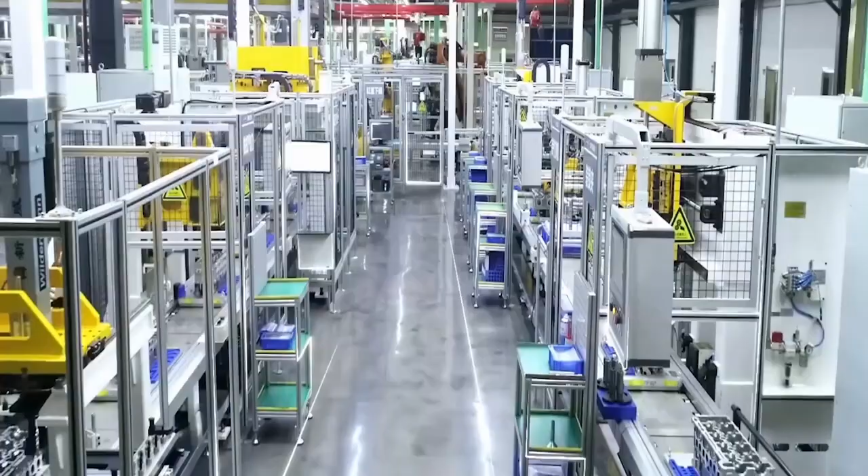Brief introduction of YC6L series engine. Designed jointly by Yuchai and Germany FEV Engine Technology Company Limited, a world-renowned research and development company for internal combustion engine. The YC6L series engine is a high-power commercial engine created by dozens of top experts, incorporating current international advanced design concepts and developed design methods.

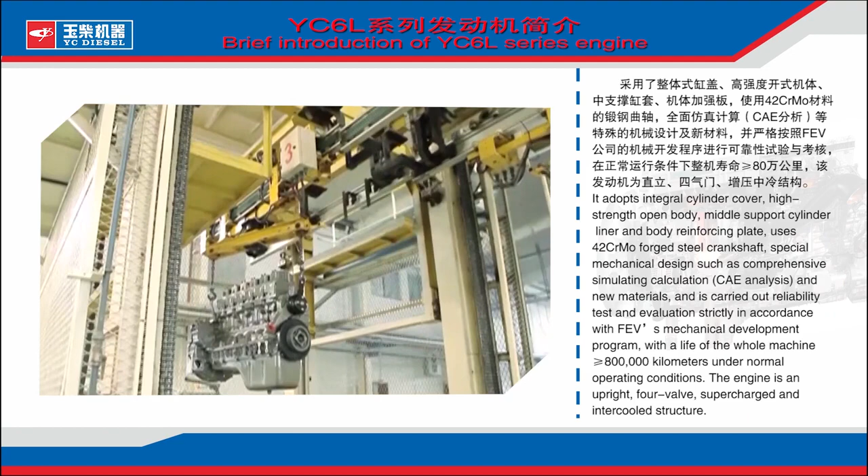It is characterized by high reliability, lightweight, low fuel consumption, slight vibration, and low noise, and is the benchmark power for high-weight passenger vehicles and lightweight heavy trucks. It adopts integral cylinder cover, high-strength open body, middle support cylinder liner, and body reinforcing plate. Uses 42CrMo forged steel crankshaft.

Special mechanical design, such as comprehensive simulating calculation, CAE analysis, and new materials, and reliability test and evaluation is carried out strictly in accordance with FEV's mechanical development program, with a life of the whole machine greater than or equal to 800,000 kilometers under normal operating conditions.

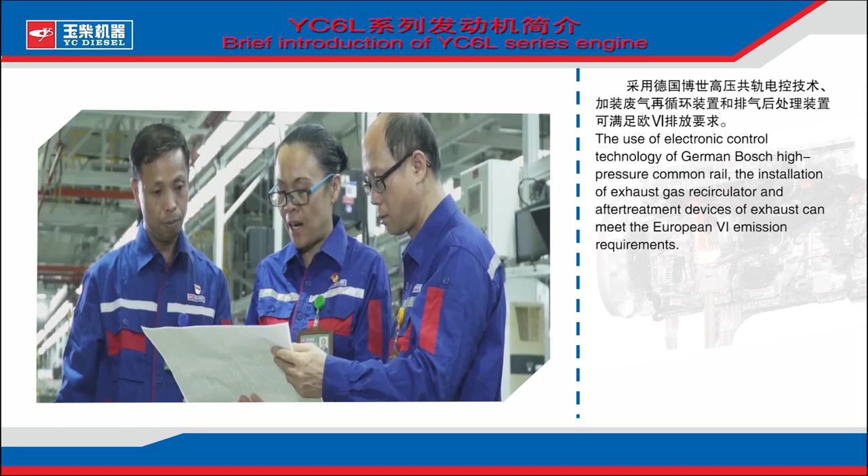The engine is an upright, 4-valve, supercharged and intercooled structure. The use of electronic control technology of German Bosch high-pressure common rail, the installation of exhaust gas recirculator and exhaust after-treatment devices can meet the European VI emission requirements.

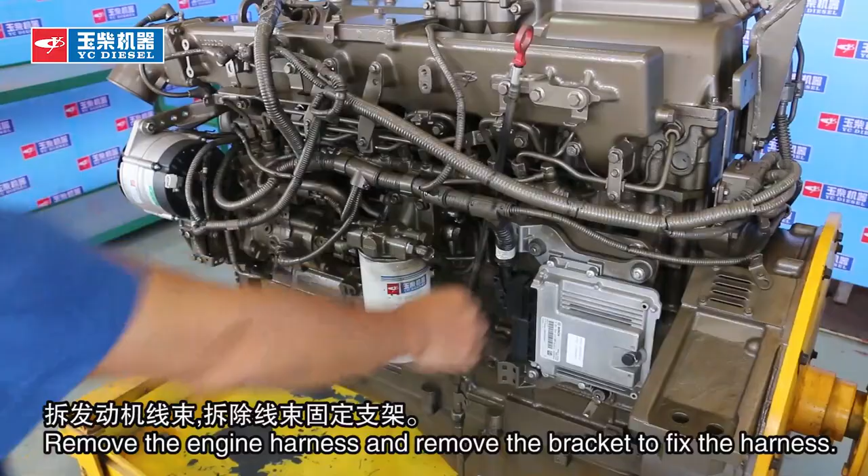Part 1. Disassembly of Yuchai 6L engine. 1. Intake surface. Remove the vent hose. Remove the engine harness and remove the bracket to fix the harness. Note: when pulling and inserting the sensor connector, be careful to open the latch, otherwise the latch will be damaged.

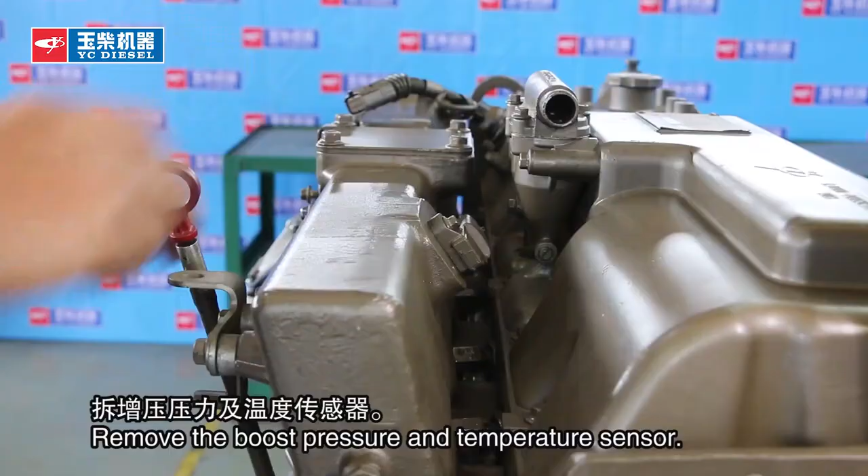Remove crankshaft sensor. Remove the boost pressure and temperature sensor. Remove the water temperature sensor. Remove oil pressure sensor.

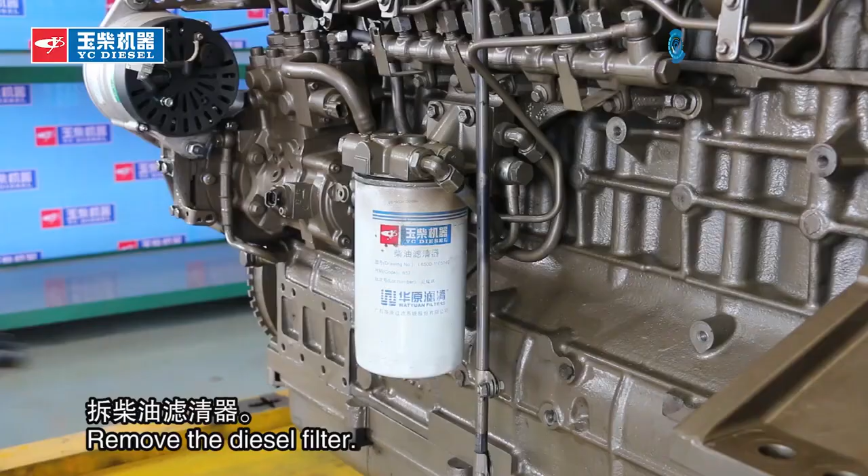Remove ECU and bracket. Note: ECU should be handled with care to prevent collision. Please protect the ECU socket. Remove the diesel filter. Remove the fill pipe, pipe clamp, and bracket.

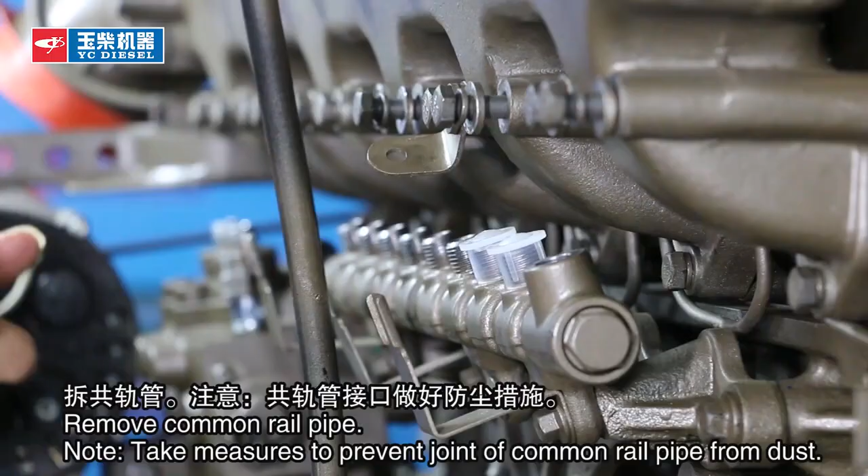Note: take measures to prevent all oil pipe joints from dust. Remove common rail pipe. Note: take measures to prevent joint of common rail pipe from dust. Remove the air inlet pipe. Note: take protective measures at the inlet pipe mouth to prevent foreign matters from entering the pipe.

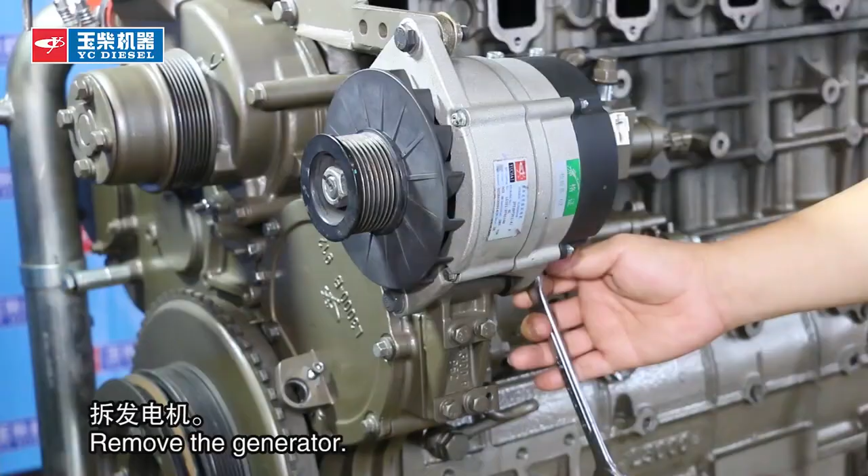2. Front gear chain. Remove the tension pulley and take off the belt. Note: lock the tension pulley with a pin. Remove the generator. Note: the generator should be placed separately and the terminal should be placed upward. Remove thermostat, seat, and water pump.

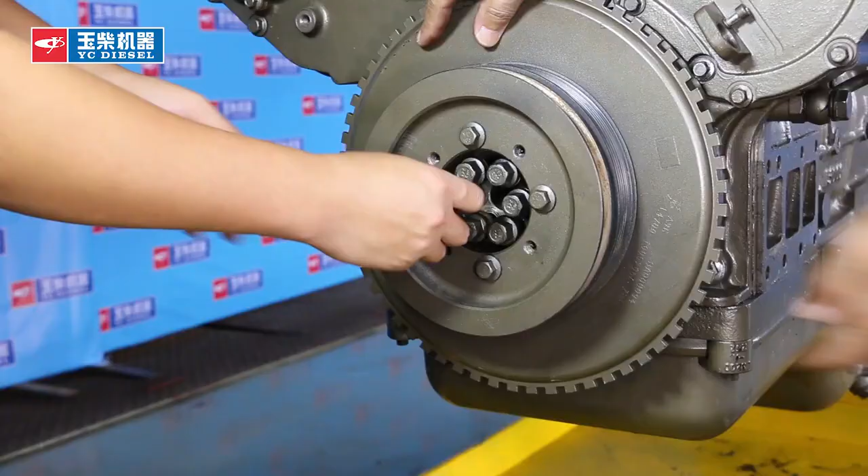Remove the pulley shock absorber. Note: when removing the pulley shock absorber, loosen the bolts crosswise. 3. Exhaust surface. Remove the supercharger. Note: do not hold the push rod of the supercharger bypass valve by hand. Block the inlet and outlet of the supercharger and the oil inlet and outlet hole with a plug to prevent foreign matters from entering it.

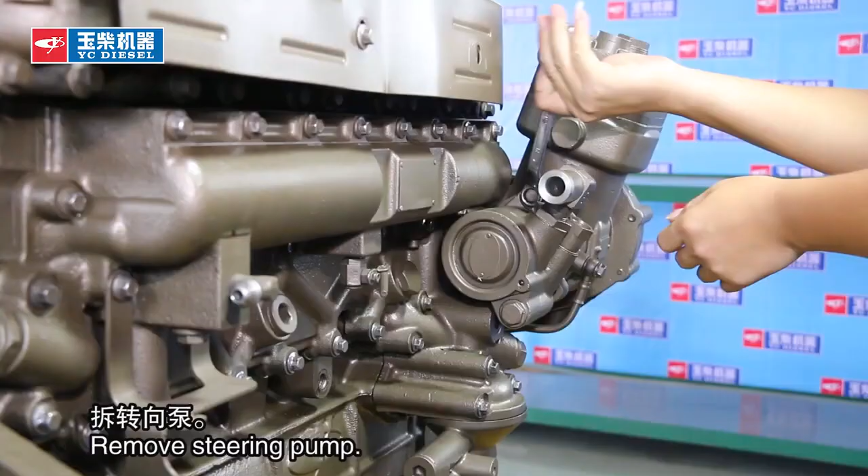Remove steering pump. Note: take protective measures for all interfaces of steering pump. Remove the air compressor. Note: take protective measures for all interfaces of air compressor. Remove the starter. Remove the exhaust pipe heat shield and exhaust pipe.

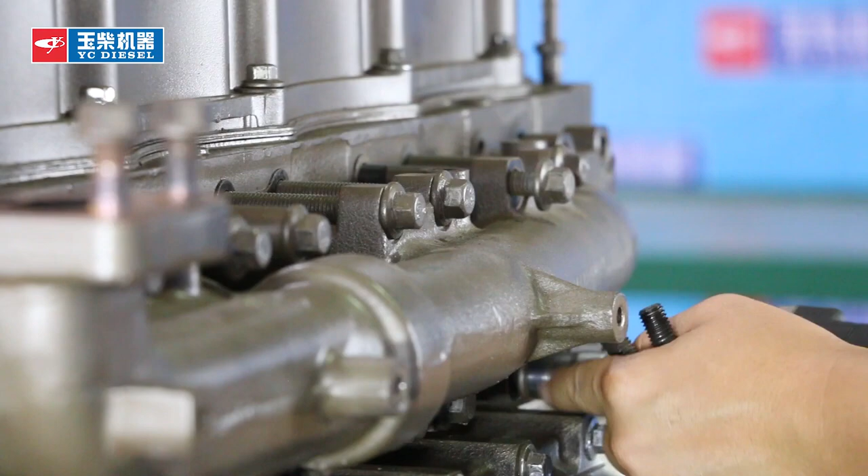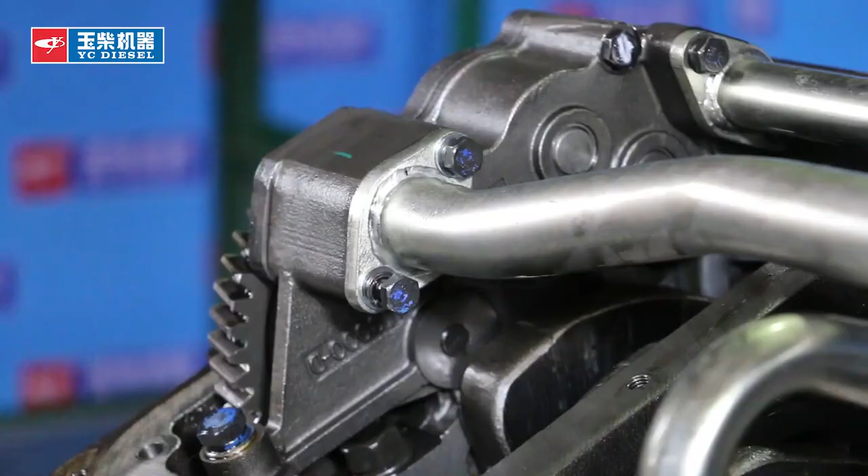Remove the oil filter. Remove the oil cooler. 4. Gear housing surface. Remove the oil dipstick and oil pan. Remove the oil filter. Remove the oil pump. Remove the body reinforcement plate.

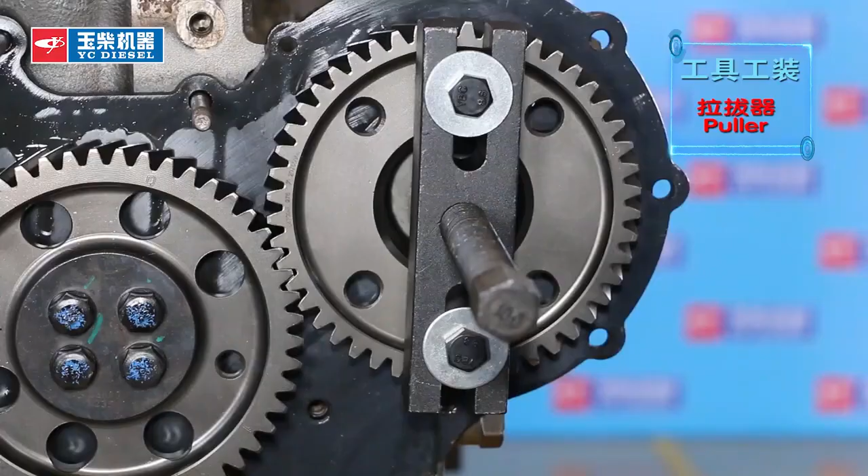Remove the timing gear housing. Remove the front crankshaft oil seal. Remove the gear. Remove the high-pressure oil pump. Note: take protective measures for all interfaces of oil pump.

Remove the idler gear. Remove the camshaft gear. Remove the baffle plate. 5. Cylinder head components. Remove cylinder head cover.

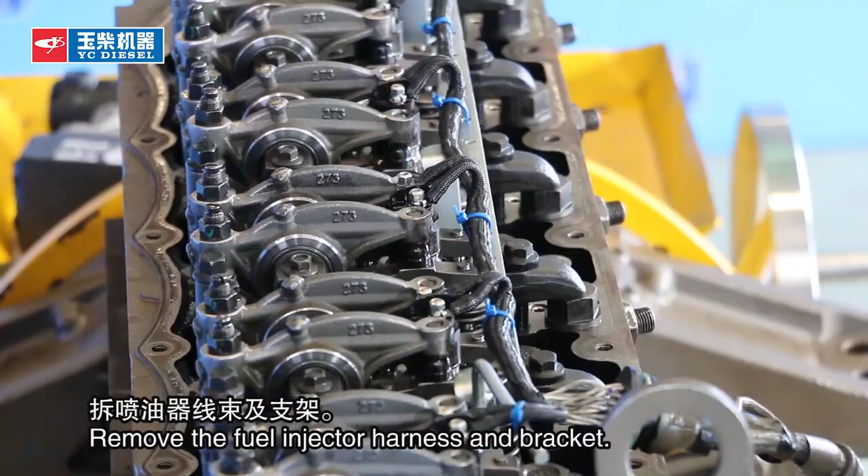Remove the fuel injector harness and bracket. Remove the fuel injector pressure plate. Remove the high pressure pipe, and remove the fuel injector. Note: mark cylinder of the fuel injector and take protective measures.

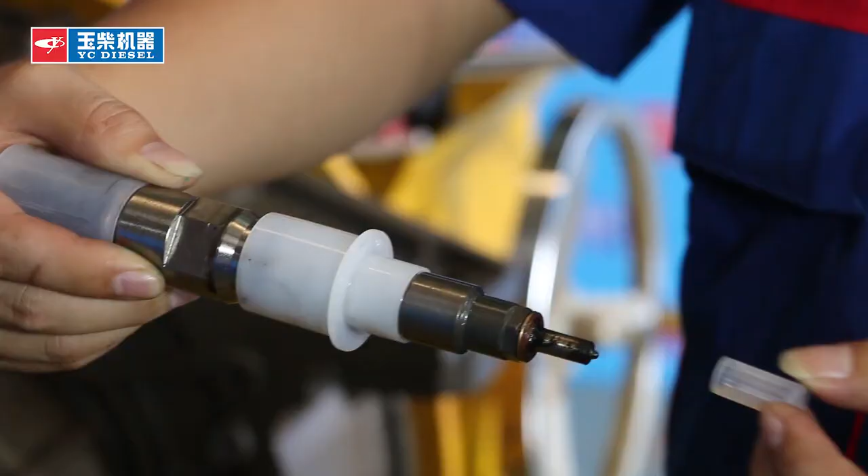Remove the rocker arm. Note: mark each cylinder before removing the rocker arm. Take out the push rod. Remove the cylinder head. Loosen and mark all cylinder head bolts. Note: loosen the bolts from both ends to the middle in turn.

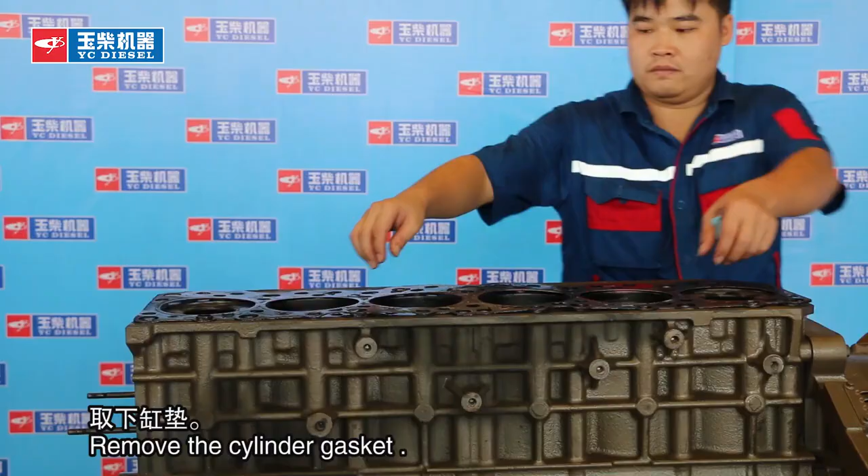Take out the cylinder head bolt. Lift the cylinder head down with the lifting equipment to a clean and flat table. Remove the cylinder gasket. Take out the valve tappet. Remove the valve spring and lock clamp with a special tool for valve disassembly and assembly. Note: mark each cylinder before removing the valve.

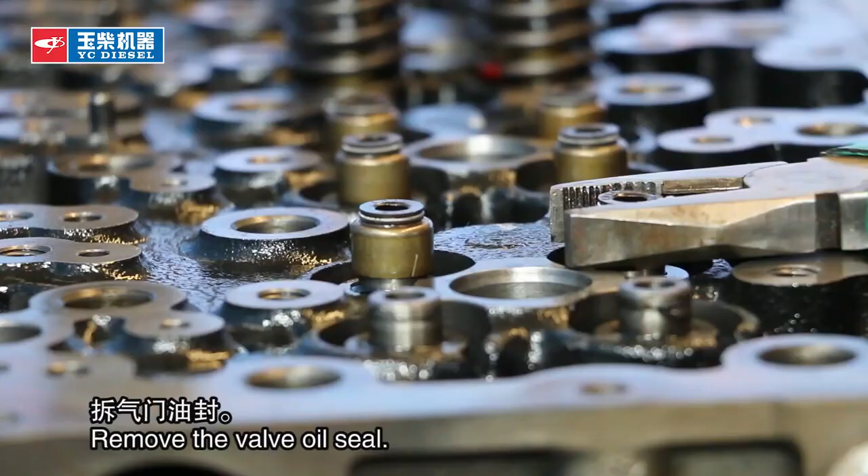Take out the valve. Remove the valve oil seal. 6. Cylinder block assembly. Remove the camshaft bolt. Rotate the camshaft and slowly extract the camshaft assembly from the hole.

Mark the piston connecting rod assembly of cylinder 1 to 6 with an oil pen. Remove the piston connecting rod bolt and take out the piston connecting rod assembly from the top of the cylinder.

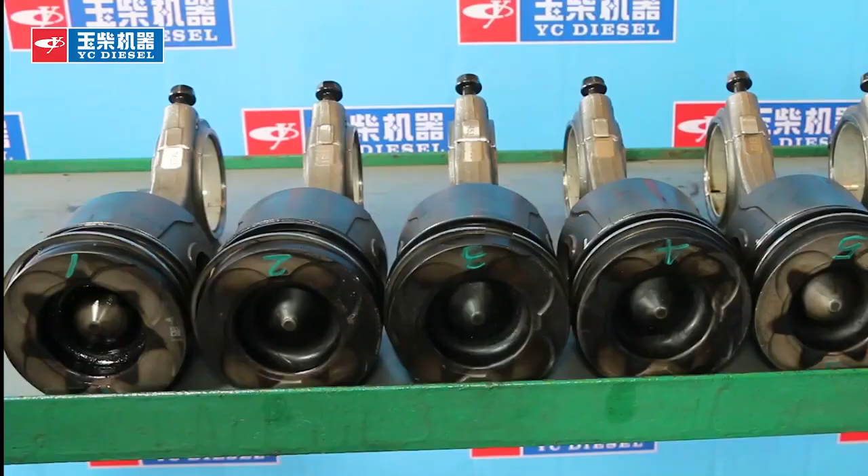Remove the piston pin retaining ring with calipers and remove the piston pin. Remove piston rings with piston ring calipers. The first ring is double-sided trapezoid ring. The second ring is conical twisted ring, and the third ring is steel strip combined oil ring.

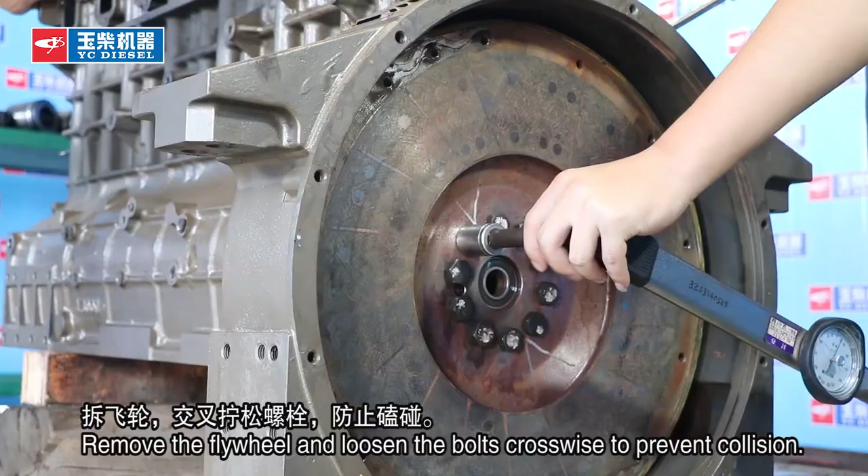Loosen the mounting bolts of clutch pressure plate assembly and remove the clutch pressure plate and clutch driven plate. Remove the flywheel and loosen the bolts crosswise to prevent collision. Loosen the mounting bolts of the flywheel housing and remove the flywheel housing. Remove the crankshaft rear oil seal.

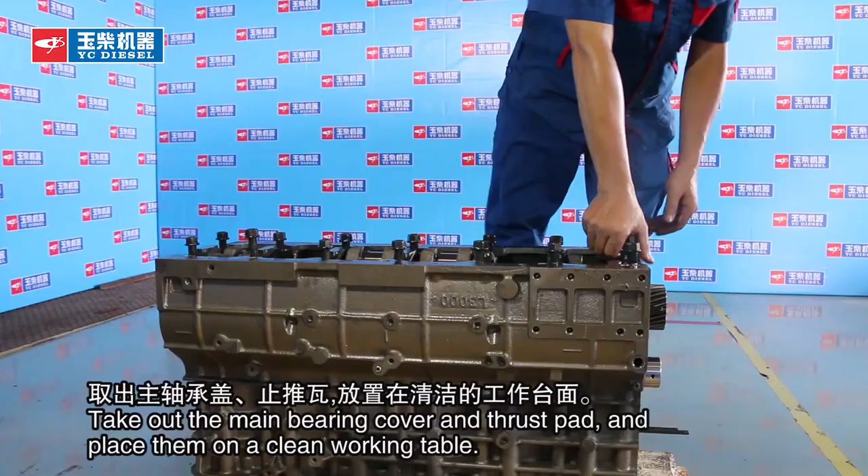Remove the cooling spray nozzle. Pull up the cylinder liner for a short distance with the cylinder sleeve drawing tool. Slowly lift the cylinder liner with both hands.

Place it on a clean working table. Mark the corresponding cylinder number on the outer wall of the cylinder liner. Remove the water seal ring of the cylinder liner.

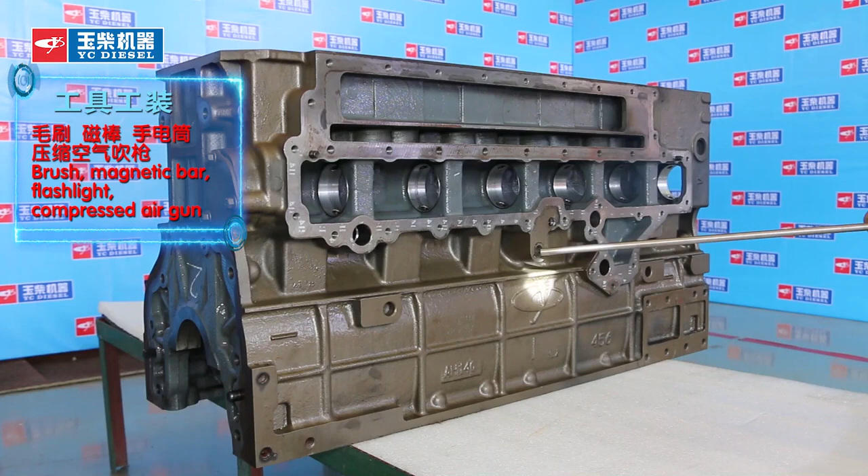Apply thread glue to the bolt and install the piston cooling nozzle. The tightening torque is 30 Nm.

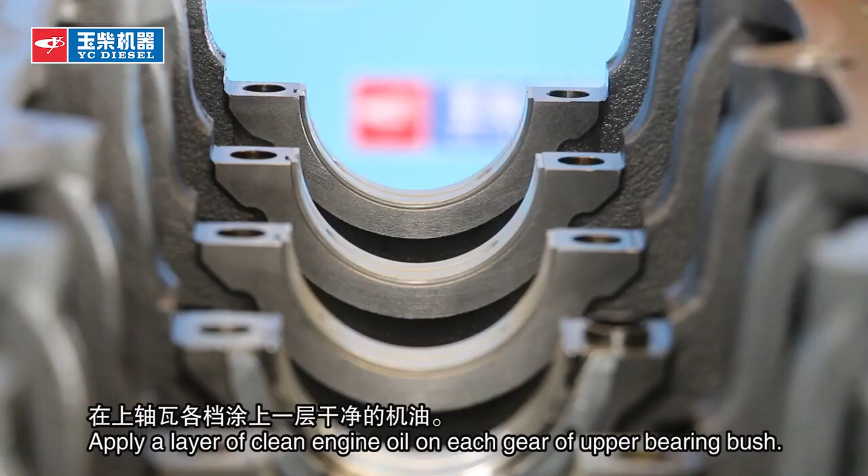Installation of main bearing bush. Wipe and clean the back of bearing bush with a clean cloth, and then install the upper bearing bush in place. Apply a layer of clean engine oil on each gear of upper bearing bush.

Clean the main bearing cover. Wipe the back of the bearing with a clean cloth and install the lower bearing bush in turn on the main bearing cover.

Hoist crankshaft. Clean the crankshaft surface and oil duct. Add new oil into the journal and oil duct. Lift the crankshaft and put it into the main bearing of the cylinder block.

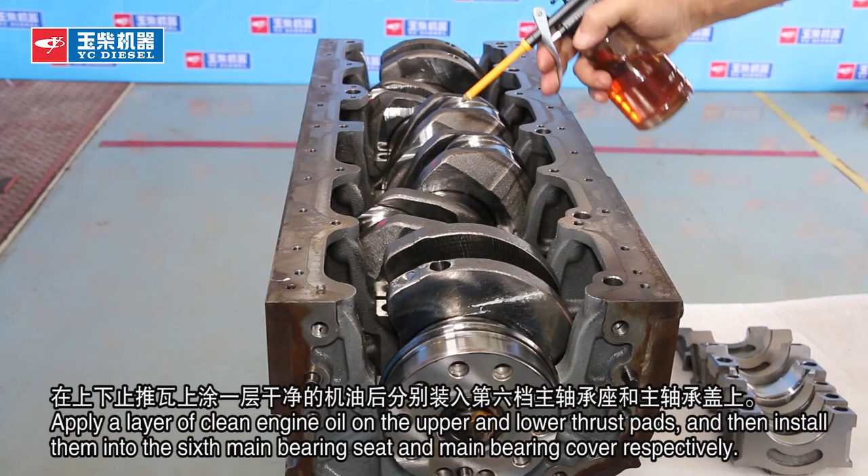Apply a layer of clean engine oil on the upper and lower thrust pads, and then install them into the 6th main bearing seat and main bearing cover respectively. Apply a layer of clean engine oil on the lower main bearing bush and install the main bearing cover.

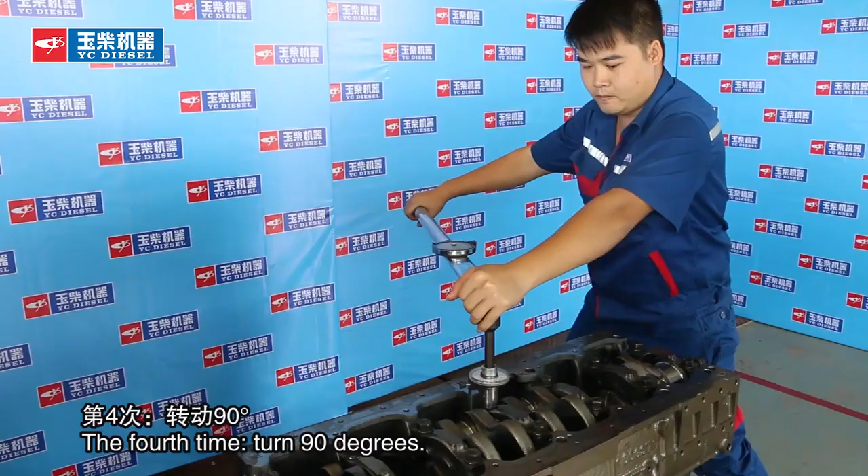Tighten the bolts in the sequence shown. The first time, tighten to 40 Nm. The second time, tighten to 70 Nm. Loosen. The third time, tighten to 90 Nm. The fourth time, turn 90 degrees.

Measure the axial clearance of crankshaft. 0.10 to 0.26 mm is qualified. Check whether there are cracks, rust, and bruises inside and outside the cylinder liner, and whether there is burr on the chamfer of the outer circle.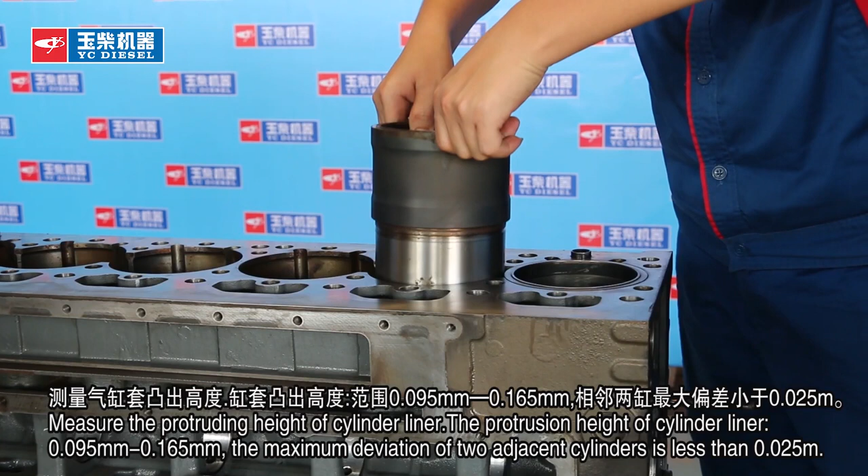Install the cylinder liner without sealing ring into the cylinder bore of cylinder block. The protrusion height of cylinder liner is 0.095 mm to 0.165 mm. The maximum deviation of two adjacent cylinders is less than 0.025 mm. Take out the cylinder liner after it is measured qualified.

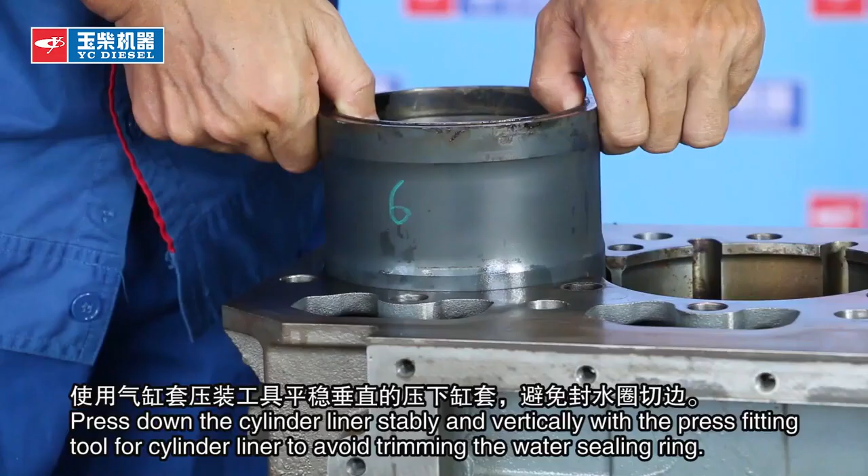Check whether the new water sealing ring is trimmed, distorted, and damaged. Install the water sealing ring after applying Vaseline. Press down the cylinder liner stably and vertically with the press fitting tool for cylinder liner to avoid trimming the water sealing ring.

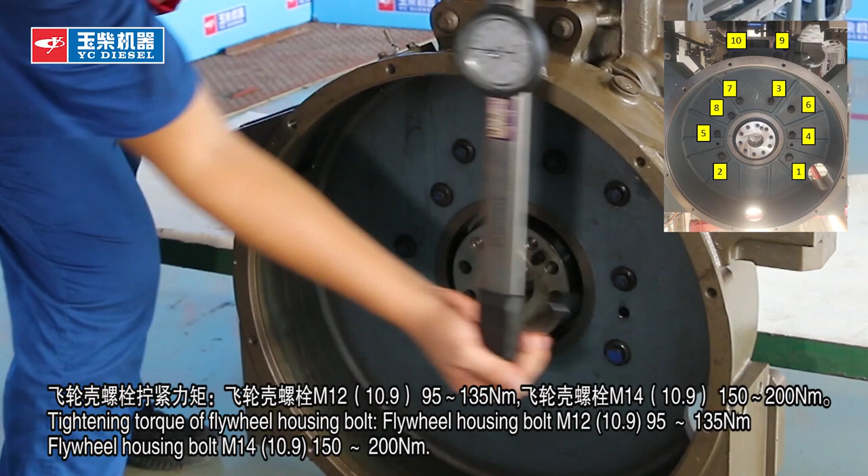Install the locating pin and flywheel housing. Pre-tighten the bolts and then tighten them with a torque wrench crosswise according to the specified torque. Tightening torque of flywheel housing bolt: M12 10.9, 95 to 135 Nm. M14 10.9, 150 to 200 Nm.

Install the crankshaft rear oil seal. Check the appearance of flywheel for quality problems. Assemble the guide rod. Align the flywheel with the locating pin and then install the flywheel bolt coated with a small amount of thread glue.

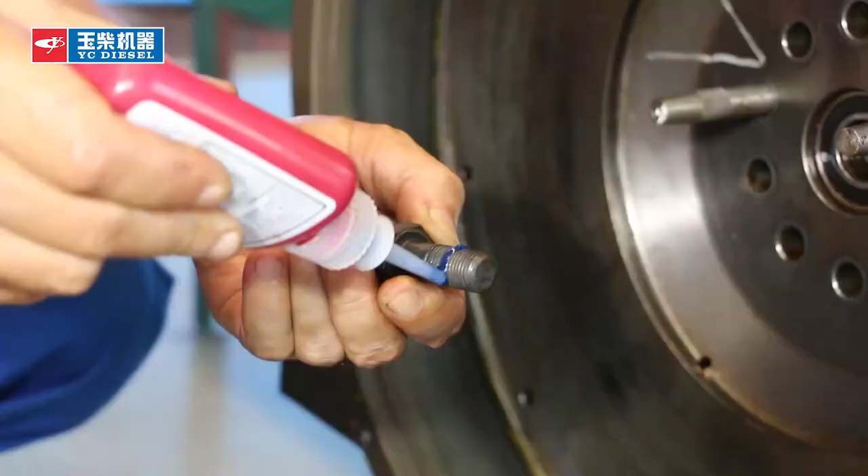Tighten the bolts alternately in turn as shown in the figure. M14 175 Nm, M12 110 Nm. Wipe the joint surface of clutch pressure plate with a clean cloth. Install the clutch driven plate and clutch pressure plate on the flywheel assembly. Insert them with the clutch centering tool to ensure that the clutch is coaxial with the flywheel.

Screw the mounting bolt and washer of the pressure plate into the screw hole by 2 to 3 threads, and then tighten it with a torque wrench in diagonal cross. Tightening torque of M10 clutch bolt: 40 to 60 Nm.

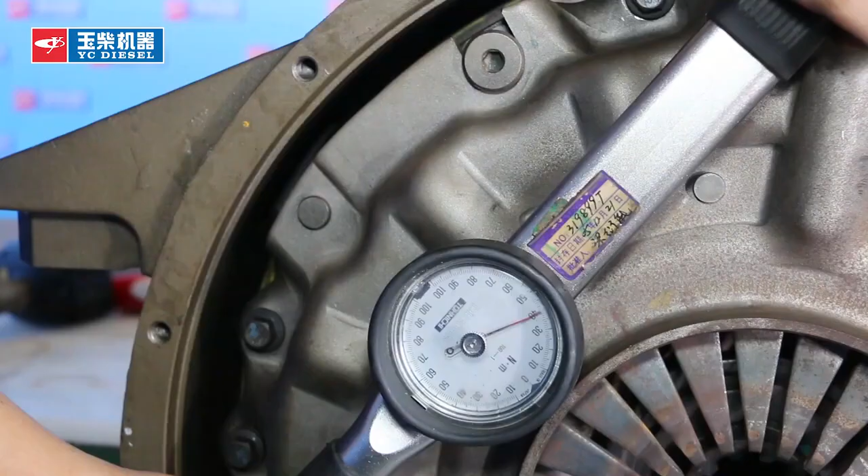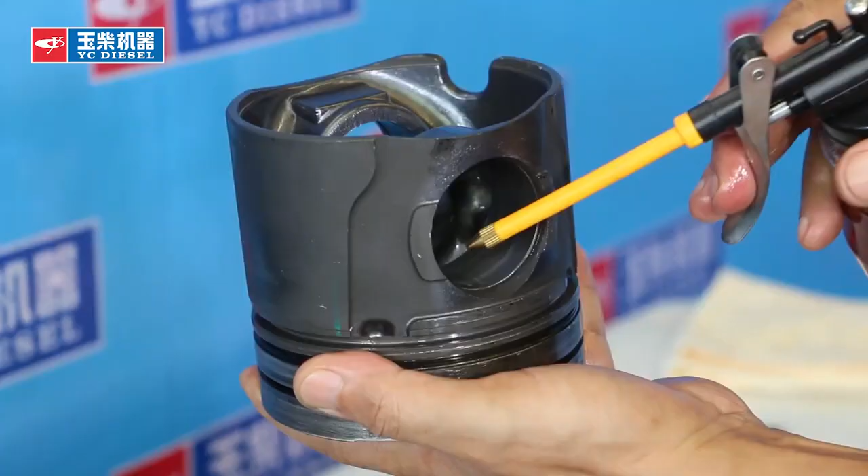Check the piston ring, piston pin, and connecting rod for burr, crack, rust, and other defects. Apply a layer of clean engine oil on the piston pin and pinhole. Assemble the piston and connecting rod together.

Install the piston pin retaining ring. The piston pin and retaining ring can rotate smoothly. The direction of forward arrow mark on the piston should be consistent with that of forward mark on the connecting rod.

Installation of piston ring. 1. First, install the third spring type combined oil ring. Install the spring in the oil ring groove. And then install the liner ring and keep 180 degrees between the opening of the liner ring and the spring.

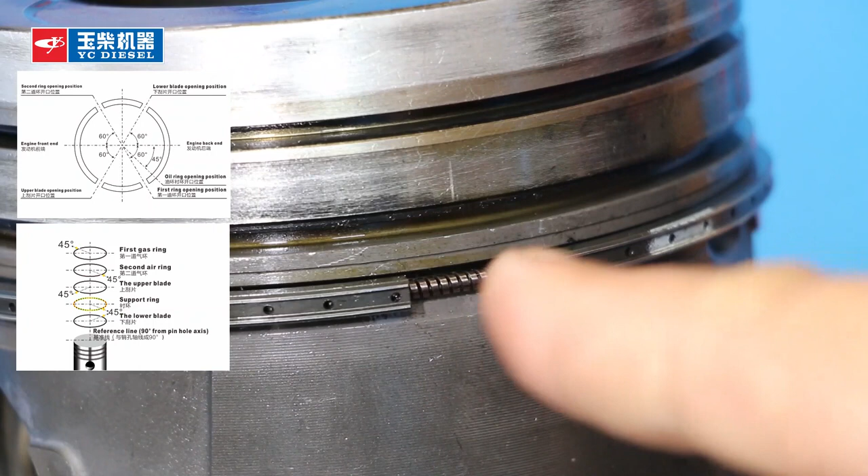2. Install the second compression ring and the first compression ring. Note, the top mark of piston ring is upward. Install connecting rod bearing.

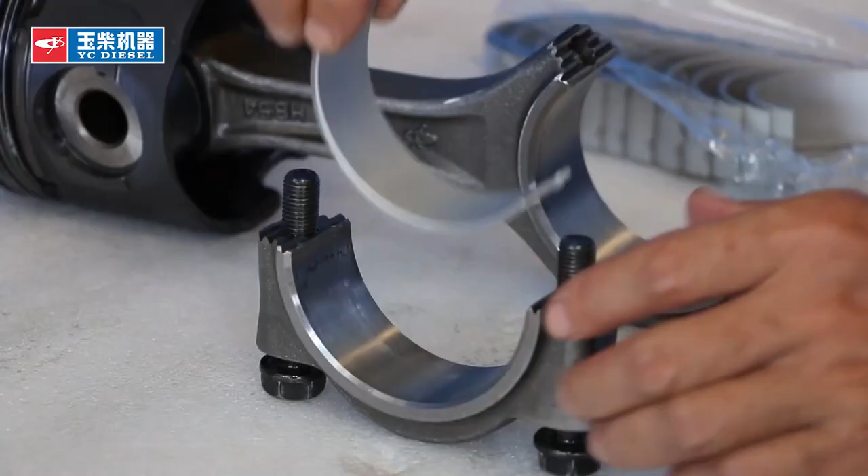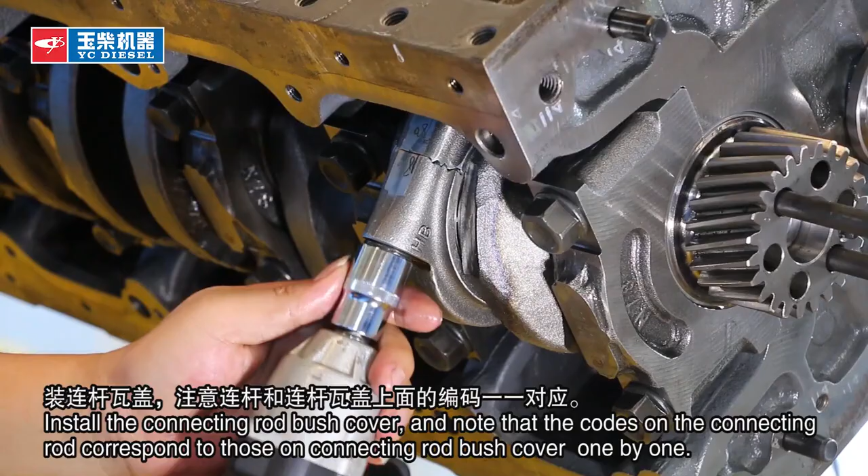Install the connecting rod bush cover, and note that the codes on the connecting rod correspond to those on connecting rod bush cover one by one. Bolt torque of upper connecting rod: the first tightening torque 30 Nm, the second tightening torque 60 Nm, the third time the angle is 60 degrees. Note, the connecting rod bolt can be used twice at most.

Turn the crankshaft to check whether the piston moves flexibly. Measure the height of piston protruding from the top surface of cylinder block, minus 0.23 plus 0.03 mm. The height difference of piston protrusion for the same machine smaller than or equal to 0.15 mm.

2. Installation of gear housing components. Install the front cover plate gasket of the gear housing. Apply glue uniformly. When installing the front cover plate of gear housing, apply thread glue to the fastening bolts. Bolt torque 30 Nm. Apply new engine oil to camshaft surface and bushing.

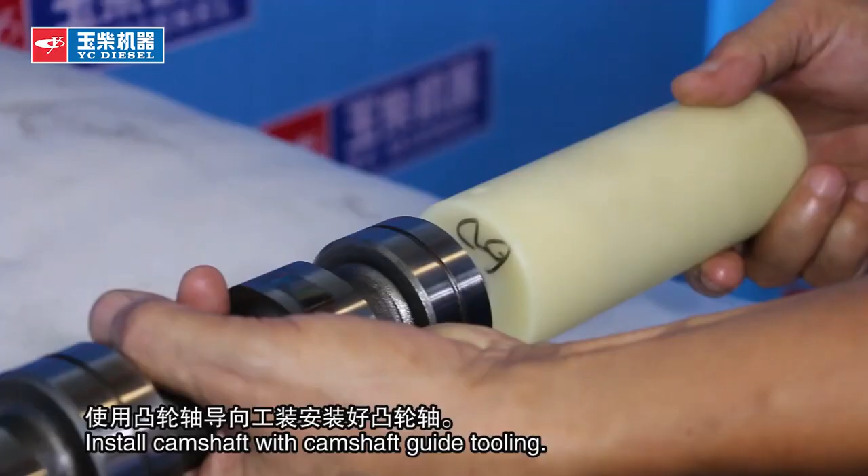Install camshaft with camshaft guide tooling. Fasten camshaft bolts, which need to be coated with thread glue. Screw torque of installing camshaft thrust plate 30 Nm. Camshaft gear screw torque 110 Nm. Install the idler gear and buffer plate.

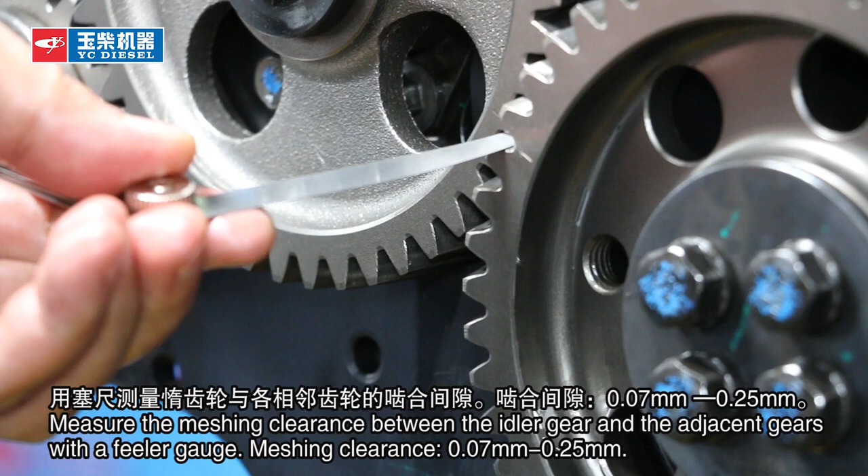Note, when installing the gear, the timing mark points should be aligned 0 to 0, 1 to 1. And thread glue should be added to the bolts. Torque 60 Nm. Measure the meshing clearance between the idler gear and the adjacent gears with a feeler gauge. Meshing clearance 0.07 mm to 0.25 mm.

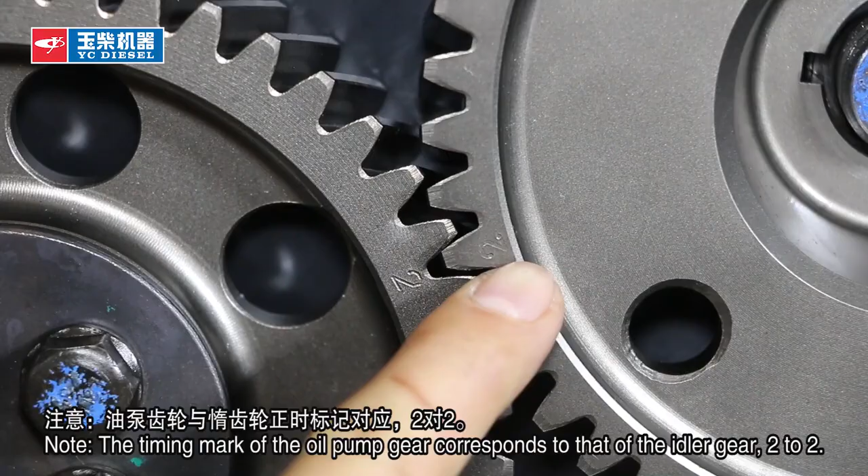Install the fuel injection pump connecting plate and seal the O-ring, not cutting the edge. The torque of M10 bolt is 60 Nm. Install the gear fuel injection pump. Note, the timing mark of the oil pump gear corresponds to that of the idler gear 2 to 2. Torque of the gear locking nut 270 Nm. Install the oil pipe of the fuel injection pump.

Apply sealant on the gasket of the oil cooler. Install the oil cooler. Tighten the oil cooler assembly to fixed bolts M8 30 Nm.

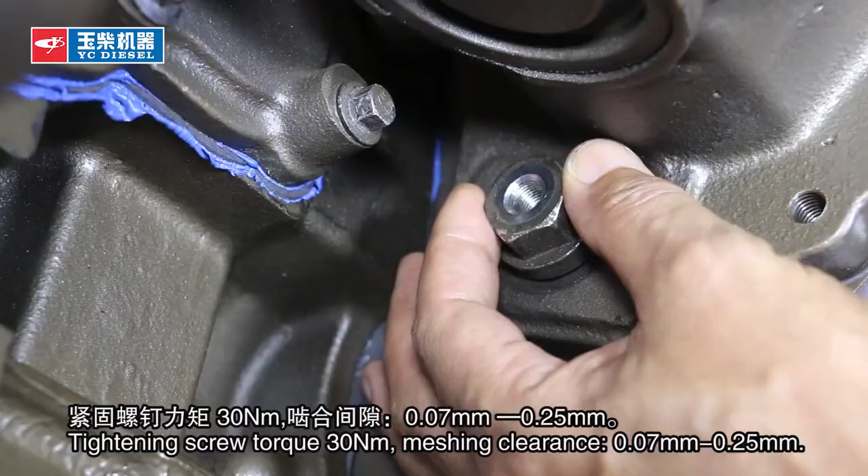Install the air compressor and gasket. Note: apply sealant on the gasket. Tightening screw torque 30 Nm. Meshing clearance 0.07 mm to 0.25 mm. Install the oil pipe of the air compressor.

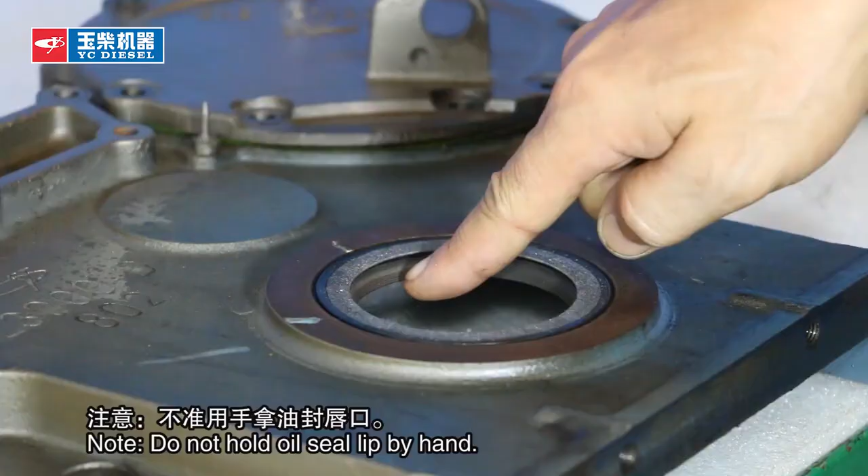Install the crankshaft front oil seal. Apply a circle of soapy water around the new front oil seal, and install the front oil seal with a plastic hammer. Note: do not hold oil seal lip by hand. Apply sealant evenly on both sides of the gear housing gasket.

Install the gear housing components and tighten the mounting bolts in the sequence shown. M8 screw torque 30 Nm. Apply sealant evenly on the connecting surface between the reinforcing plate and the body. Tighten the fastening bolts of the reinforcing plate. Torque 30 Nm.

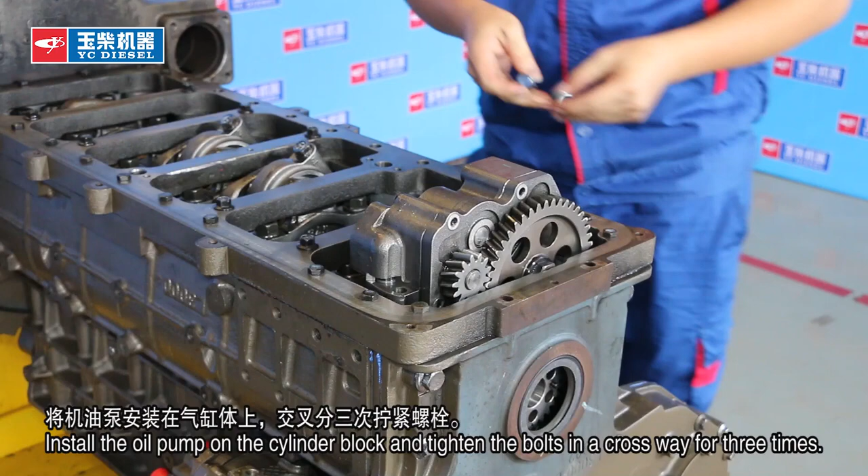Install the oil pump on the cylinder block and tighten the bolts in a crossway for 3 times. Tightening torque 45 Nm. Install the oil filter. Tighten the bolts and tighten them in a crossway for 3 times. Tightening torque M8, grade 8.8, 20 to 40 Nm.

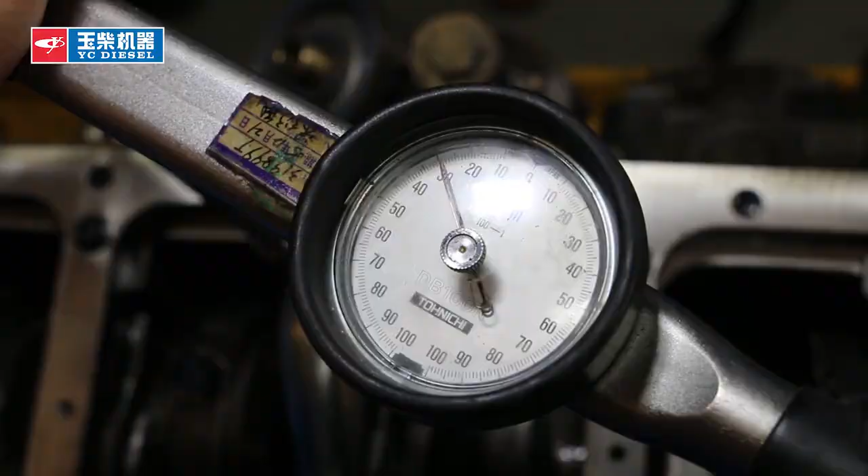Install the oil filter. Tighten the bolts and tighten them in a crossway for 3 times. Tightening torque M8, grade 8.8, 20 to 40 Nm. Install the oil pan and tighten the oil pan bolts according to the sequence shown in the figure. M8 torque 30 Nm.

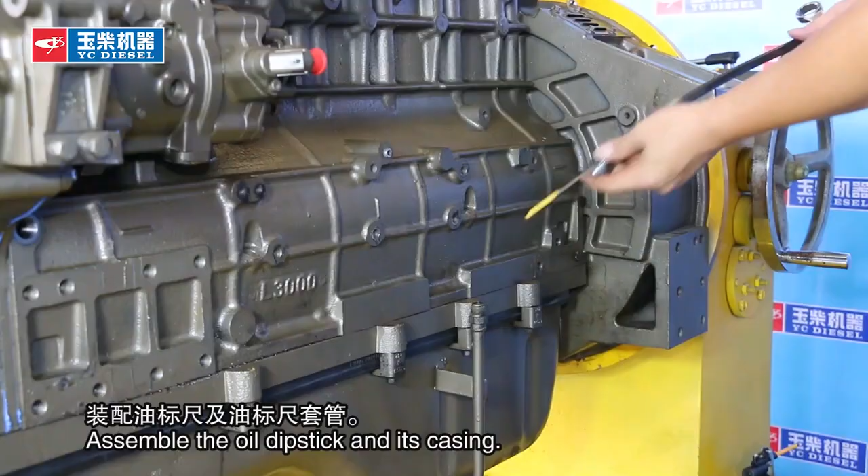Install the oil drain plug and magnet. Tightening torque of oil drain plug 60 to 80 Nm. Assemble the oil dipstick and its casing. Install the pulley shock absorber. Note: the positioning pin is aligned and installed in place, and the bolts are tightened crosswise. Tightening torque 140 Nm.

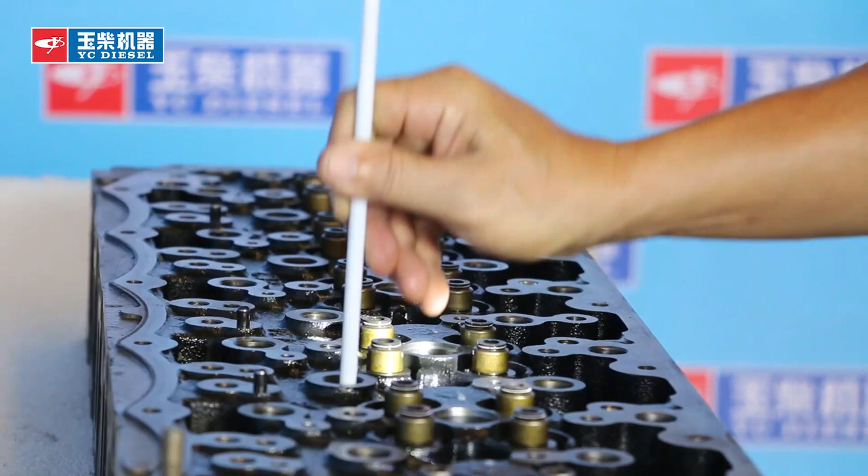Apply clean oil to the valve stem oil seal lip and valve stem head and install the valve. Install valve spring and valve spring seat. Pay attention to single spring for inlet valve and double spring for exhaust valve. Install valve lock clamp with special tool for valve spring disassembly and assembly.

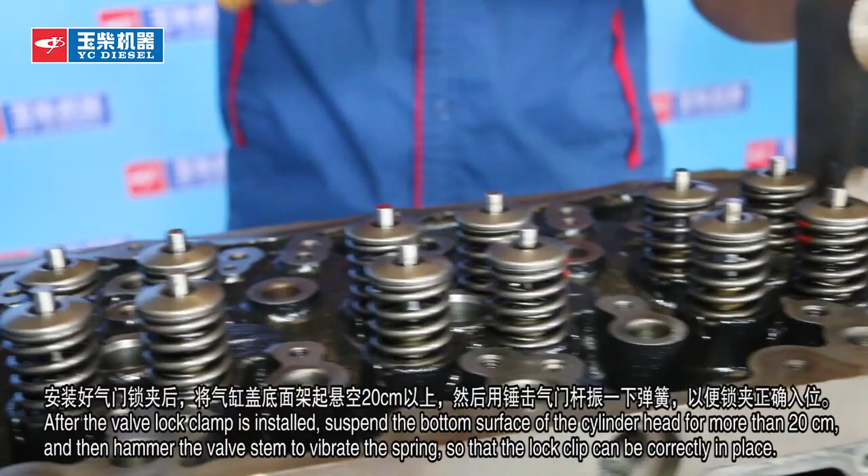After the valve lock clamp is installed, suspend the bottom surface of the cylinder head for more than 20 centimeters, and then hammer the valve stem to vibrate the spring so that the lock clip can be correctly in place. Sealing test. Add proper amount of kerosene at the intake and exhaust valves. If there is no leakage for 3 minutes, it indicates that the sealing is normal. Install the new cylinder head gasket with figure number upward.

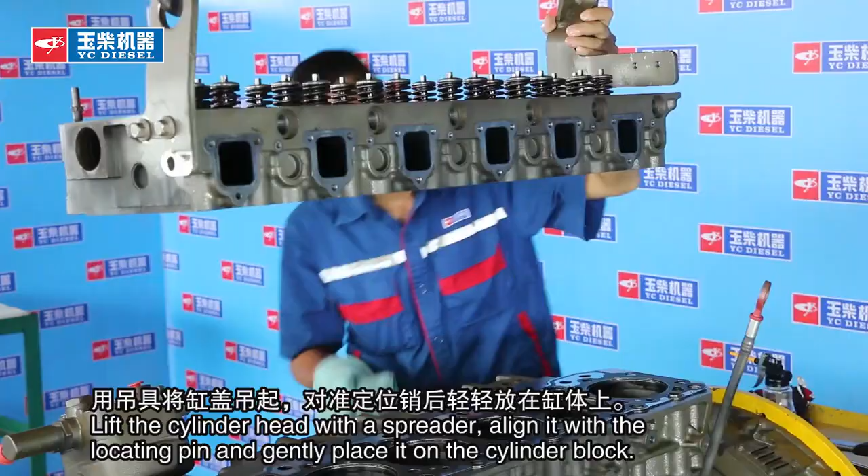Apply proper amount of engine oil on the surface of tappet and put it into tappet hole one by one. Note: there should be no burr or rust on the surface of tappet. Lift the cylinder head with a spreader, align it with the locating pin and gently place it on the cylinder block.

Insert the cylinder head fastening bolts into the screw holes respectively, and screw the bolts for more than 2 threads. Tighten the cylinder head bolts in sequence as shown in the figure. Tightening torque for the first time is 50 Nm. The tightening torque for the second time is 120 Nm. The tightening torque for the third time is 90 degrees.

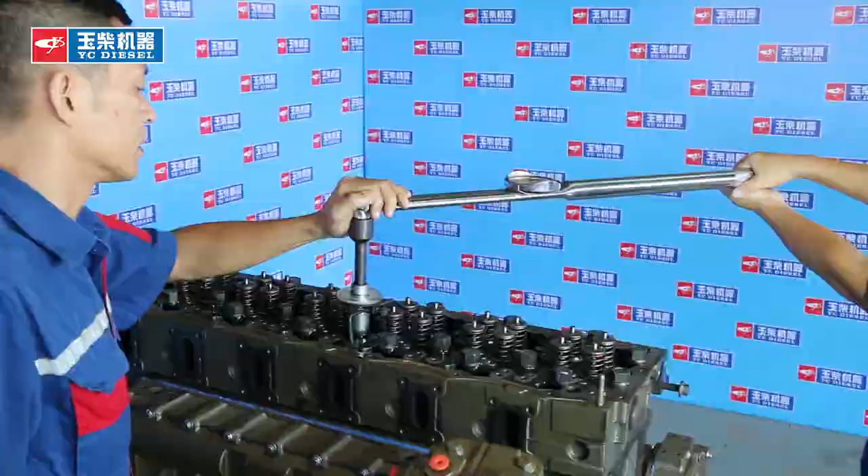Install the push rod and add proper amount of oil to the head of the push rod. Install the valve bridge. Note: the long hole of the valve bridge faces the push rod. Install the oil port O-ring on the cylinder head cover. Put the rocker shaft assembly on the rocker shaft seat and install the fastening bolts.

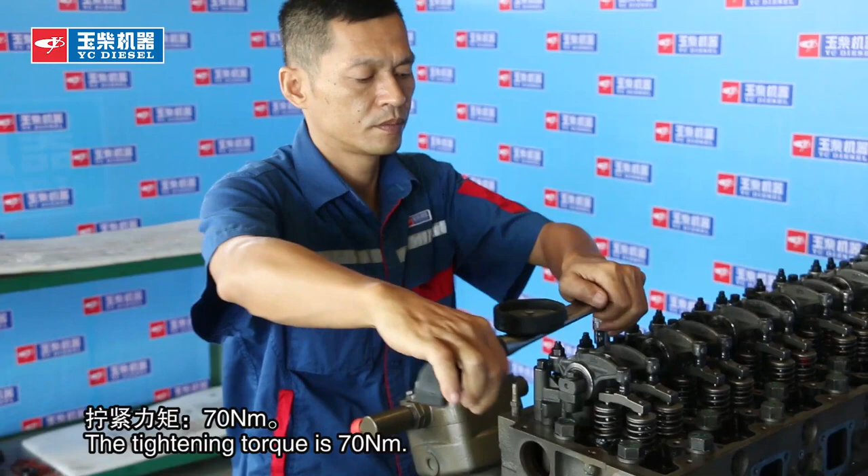Note: screw the rocker shaft fastening bolts by 2 to 3 threads by hand, and then evenly tighten with a wrench from the middle to both sides. The tightening torque is 70 Nm, and add oil to the rocker arm and other moving parts.

Adjust the valve clearance, rotate the crankshaft clockwise at the pulley end, and observe the inlet valve descending and exhaust valve rising of the sixth cylinder. The timing pointer is aligned with the zero scale mark of the belt pulley, which can be judged as the first cylinder compression TDC. Then adjust the valve clearance of 1, 2, 3, 6, 7, and 10 from the first cylinder intake valve as 1 to 6 cylinder exhaust valve as 12.

Tightening torque of nut 50 Nm, intake valve clearance 0.35 plus minus 0.05 millimeters, exhaust valve clearance 0.40 plus minus 0.05 millimeters.

Turn the crankshaft by 360 degrees so that the timing pointer is aligned with the zero scale mark of the belt pulley. This is the compression TDC of the sixth cylinder, and adjust the valve clearance of 4, 5, 8, 9, 11, and 12.

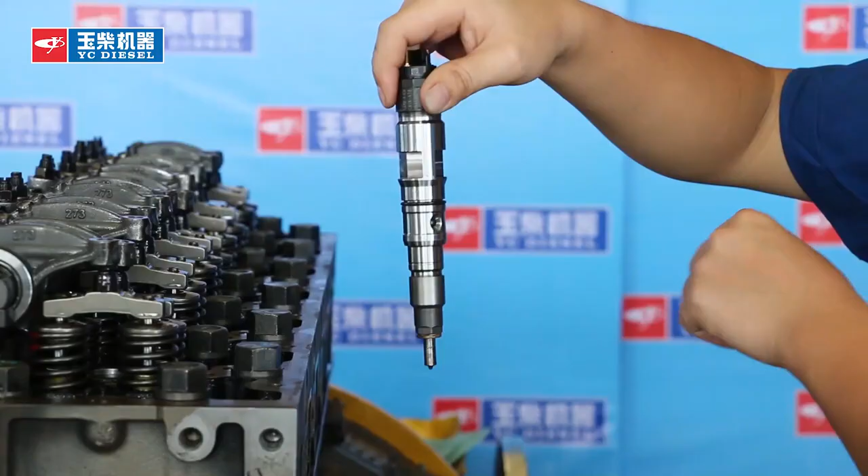Install the fuel injector and copper gasket according to the original cylinder sequence. Pre-tighten the nut of fuel injector pressure plate, torque 15 Nm, and then loosen the locking nut of fuel injector pressure plate.

Install the high-pressure connecting pipe and pre-tighten the nut. Note: the high-pressure connecting pipe should be aligned with the fuel inlet of the fuel injector. Tighten nut of high-pressure connecting pipe. Torque 50 Nm. Tighten the locking nut of the pressure plate of the fuel injector with a torque of 14 Nm.

Install fuel injector harness bracket and injector terminal nut. Harness bracket bolt M8 25 Nm. Terminal nut 1.2 to 1.5 Nm.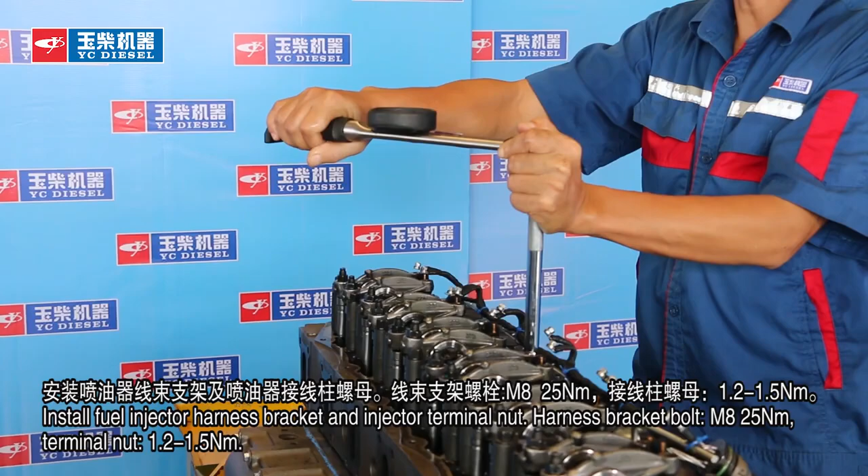Check that the cylinder head cover is not damaged. Put down the cylinder head cover and tighten the fastening screws. Tighten them from the middle to both sides in turn, and the bolt torque is 18 Nm.

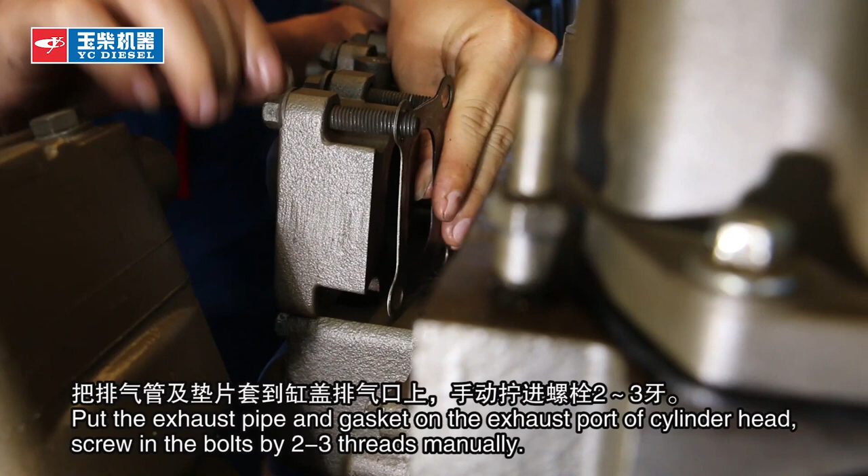(4) Installation of exhaust side. Put the exhaust pipe and gasket on the exhaust port of cylinder head. Screw in the bolts by 2 to 3 threads manually, and then tighten the exhaust pipe bolts in a crossway in the order as shown in the figure. Torque 60 Nm. Install the exhaust pipe cover.

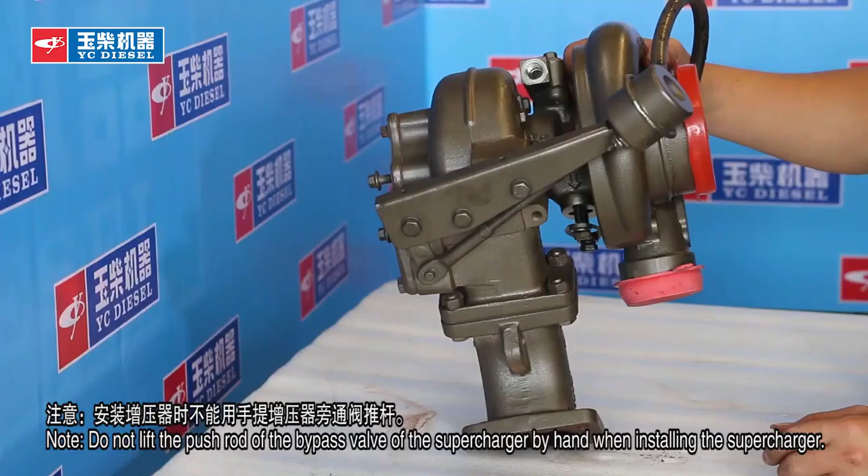Check whether the turbocharger turbine blades rotate flexibly without jamming. Install the supercharger and gasket to the exhaust pipe. Note: do not lift the pushrod of the bypass valve of the supercharger by hand when installing the supercharger. Nut torque 55 Nm.

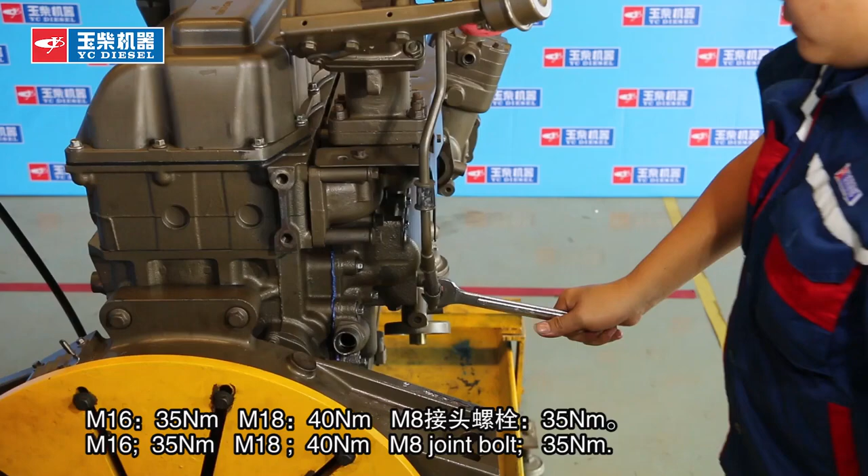Fill the oil inlet hole of turbocharger with new oil and install the oil inlet pipe of supercharger. M16 35 Nm, M18 40 Nm, M8 joint bolt 35 Nm. Install the oil return pipe and gasket to the supercharger and install the other end of the oil return pipe to the oil return joint. M8 bolt 25 Nm.

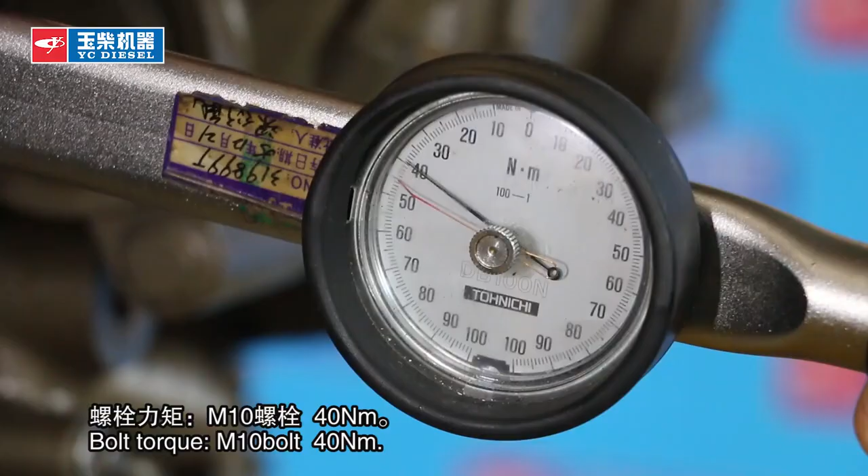Install the O-ring. Install the drive plate. Bolt torque M10 bolt 40 Nm. Install the starter and tighten the bolt torque 70 to 90 Nm.

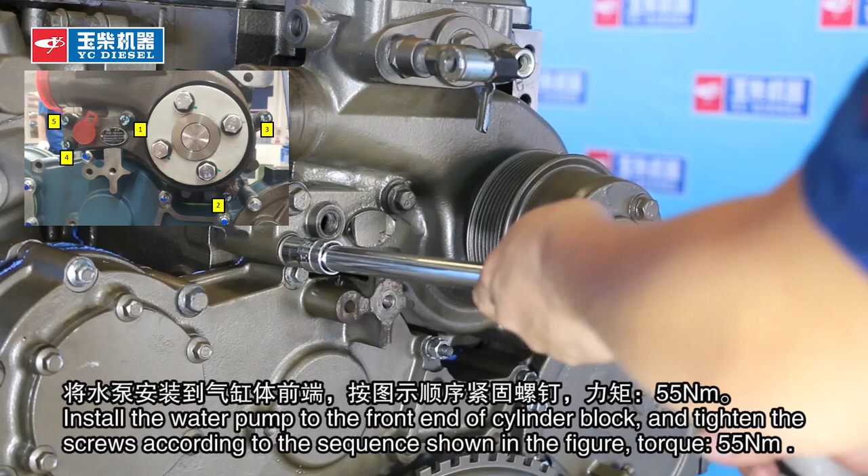Installation of front gear train. Coat the sealing ring of water pump with Vaseline. Install the water pump to the front end of cylinder block and tighten the screws according to the sequence shown in the figure. Torque 55 Nm. Install thermostat and thermostat cover.

Install the cooling water pipe. Install generator bracket and generator. Install the belt tension pulley and belt.

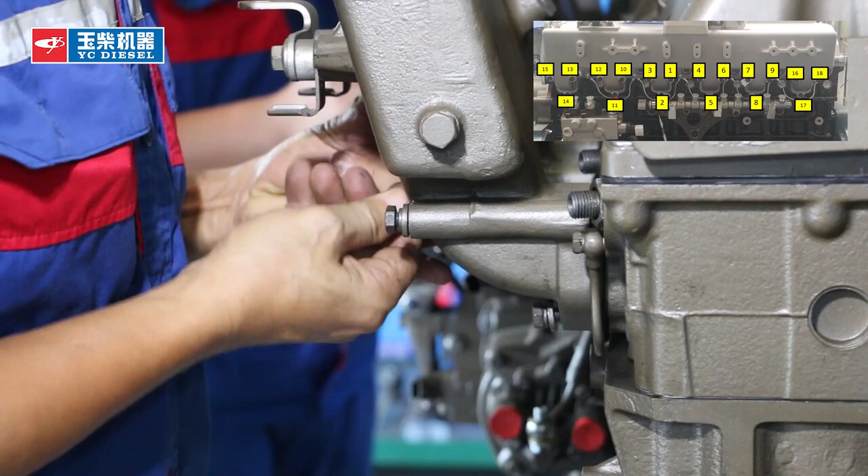Installation of intake side. Install the fuel return pipe of fuel injector. Install intake pipe and intake pipe gasket. Note: tighten the bolts in the sequence as shown in the figure. Bolt M8 30 Nm. Install common rail pipe bracket and common rail pipe.

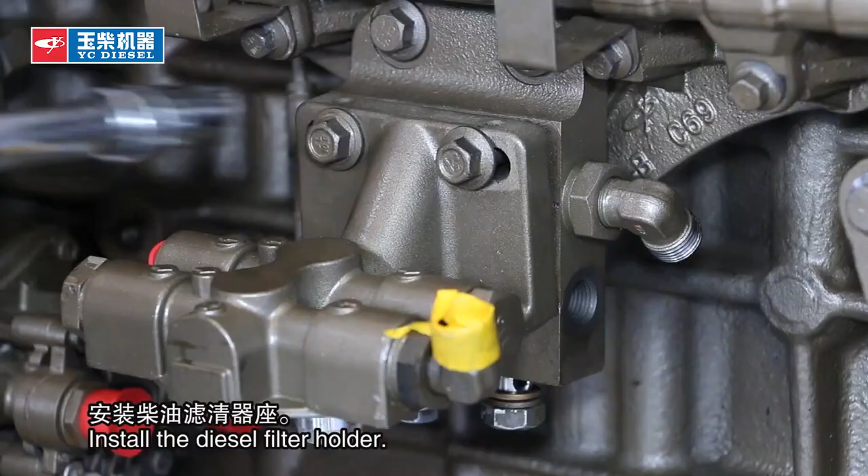Install ECU bracket and ECU. Install the high-pressure oil pipe. Install the fuel distributor. Install the diesel filter holder. Install the oil return pipe of common rail pipe.

Install the fuel injection pump to the oil return pipe of fuel distributor. Install the fine filter to the oil pipe of fuel injection pump. Install the oil transfer pump to the fine filter oil pipe.

Coat the O-ring of the new diesel filter with engine oil to prevent the O-ring from trimming. Tighten the new filter core tank by hand and then screw in with filter wrench by 1/2 to 3/4 of a turn. Install the oil filter assembly. Note: fill the oil filter with new oil before installation.

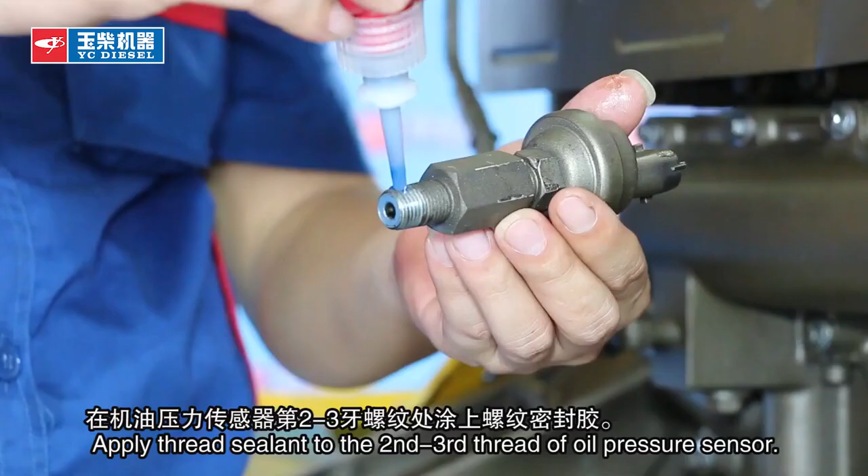Apply thread sealant to the second to third thread of oil pressure sensor. Screw oil pressure sensor into the hole by 2 to 3 threads by hand, and then tighten it with wrench. Wipe off the excess glue with a clean cotton cloth. Tighten the fixing bolt of crankshaft sensor. If there is adjusting gasket, install it together with the gasket.

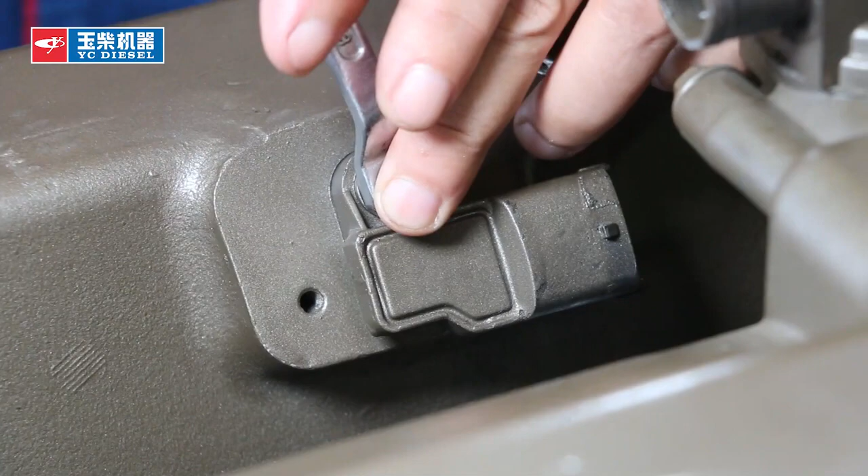Tighten the fixing bolts of boost pressure and temperature sensor. Apply a circle of sealant on the thread of water temperature sensor and install it on the corresponding screw hole. Install the harness fixing bracket and sensor connector. Note: lock the lock when installing the sensor connector. Install the breather pipe. Engine installation completed.